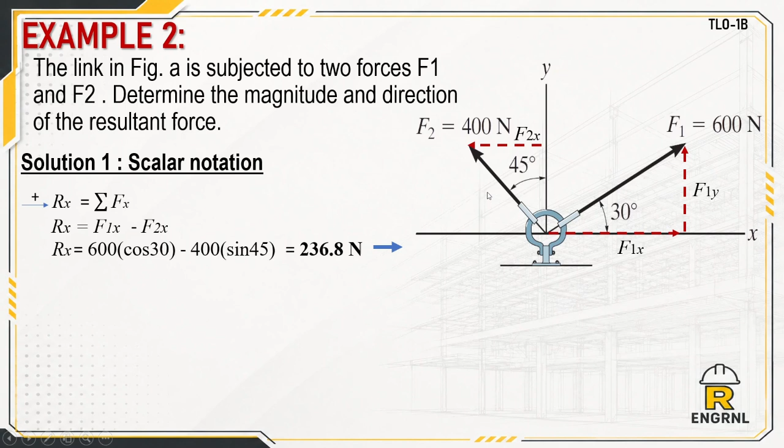600 sine 30, yung F1y, di ba po? That is opposite. And 400, sorry for this term, hindi ko yata napalitan. This is cosine. Cosine 45. Anyway, 45 degrees naman din siya, same value. So, cosine 45 po yung F2y. So, 582.8. Since resultant ng y component po is going up, lahat naman sila pataas. So, assumption is correct.

Sa scalar, kukunin natin yung resultant niya using Pythagorean concept. So, that is square root of 236.8 squared plus 582.8 squared. We have 629.07 newtons. So, dyan kayo sanay. Mas bibilis naman talaga kayo kung ito yung master nyo, kung parallelogram law concept ang sanay kayo.

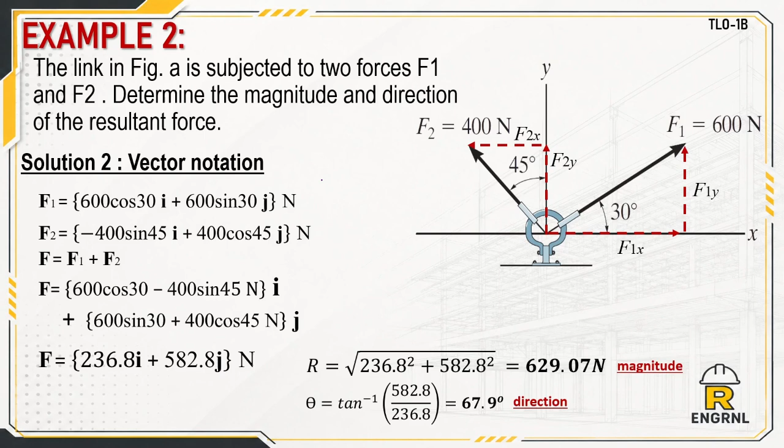So, parang nangyari, parang nadagdagan ka lang ng trabaho ng pagsusulat. Sabi ko nga sa inyo, vector notation form is for pleasant representation. Organize. Ma-appreciate nyo to kapag nag-3D na tayo. So, mas ma-appreciate nyo pala. Okay? So, thank you for this and let's go with the example 3.

So, the end of the boom, O, in figure is subjected to 3 concurrent and coplanar forces. Determine the magnitude and direction of the resultant force. So, this time, dinagdagan lang naman ng isang force. So, pwede natin gawin yung scalar muna. Kunin natin yung summation forces along X. Lahat ng pakanan ay positive para sa akin.

So, F2x yung pakanan, yung X component ng F2 pakanan. And yung dalawang force, puro pakaliwa. Kaya ganito yung ayos. Next. So, substitute. 250 sine 45 minus 400, x component of F1, and negative 200 4/5. Okay, alam nyo na to, no? So, negative 383.22 yung nakuha ko. Or I can rewrite that as this.

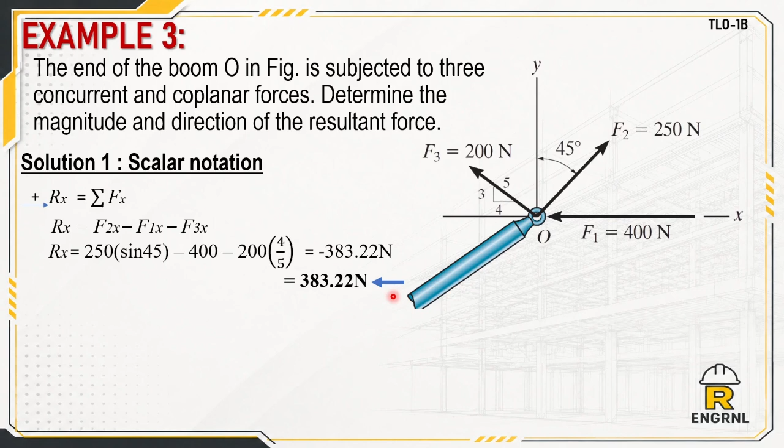So, next po is sa RY naman. Isum natin ulit, yung pataas is positive. Dalawa lang naman yung magko-contribute sa Y component kasi yung F1 is purely horizontal. So, ito siya. We have 296.78 going up. Then, if we get the resultant, Pythagorean concept, and if we get the direction, again, arctan.

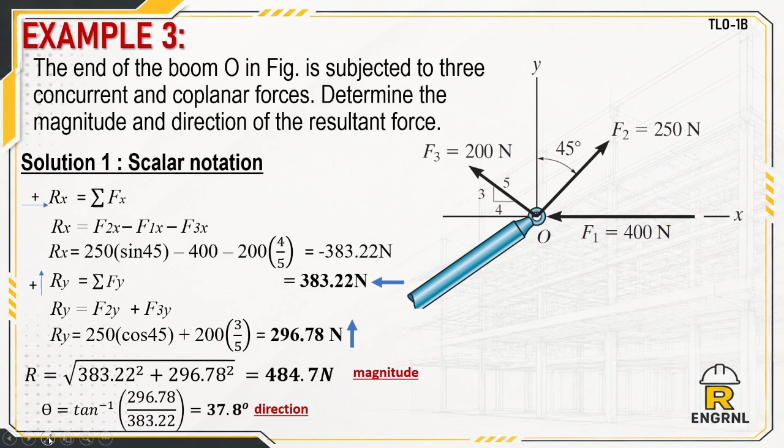Pwede rin naman na gumawa tayo ng table. Ito madalas ginagawa sa mga estudyante ko noon, para organized din tingnan. So, these are the x component and the y component. Tapos, F1, F2, F3. Isusulat nyo yung x component. Pinapayagan ko naman na isulat na lang yung direct na sagot. F1, 400, going to the left, so negative.

F2, 250 sine 45, pwede naman isulat mo na. 176.78, going to the right. And F3 is 200 times 4/5, going to the left, 160. Sorry. Going to the left yung F1, so negative. F3 is also negative. So, negative 160.

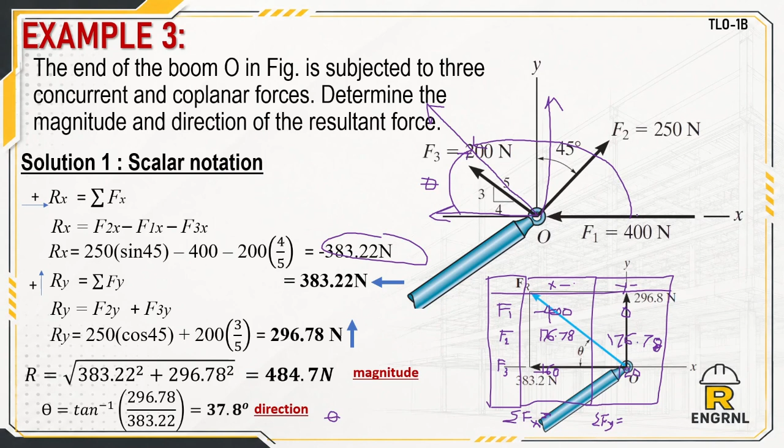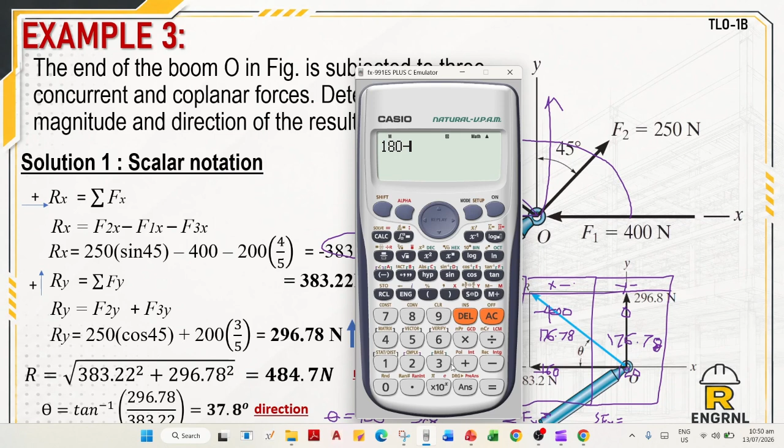Pero syempre, sinasanay natin sarili natin na lagi tayong mag-refer sa positive x-axis. So, kung kukunin natin yung talagang direction nito is 180 degrees minus yung nakuha nating 37.8. So, your theta is 142.2, counterclockwise from the positive x-axis.